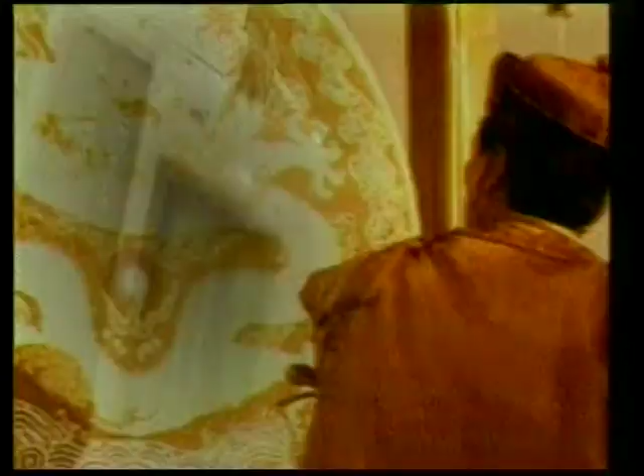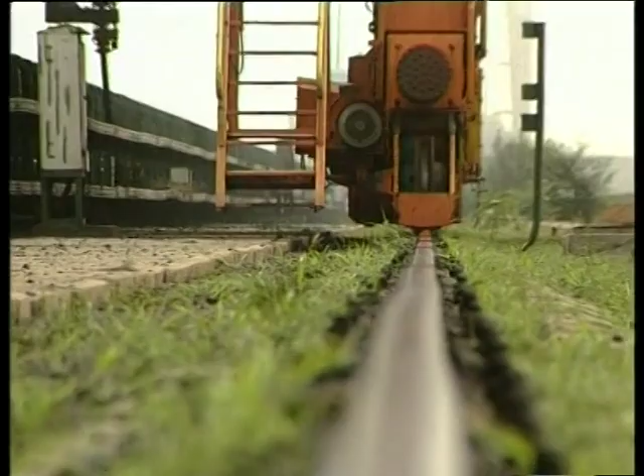The city of Shenyang has a beautiful reputation, namely, it was both the birthplace of the Qing dynasty and also the capital for two Qing emperors. However, it was the equipment manufacturing industry that widely spread the fame of Shenyang. Chinese people praise Shenyang as the first son of PR China, while friends from overseas comment Shenyang as the Oriental Ruhr.

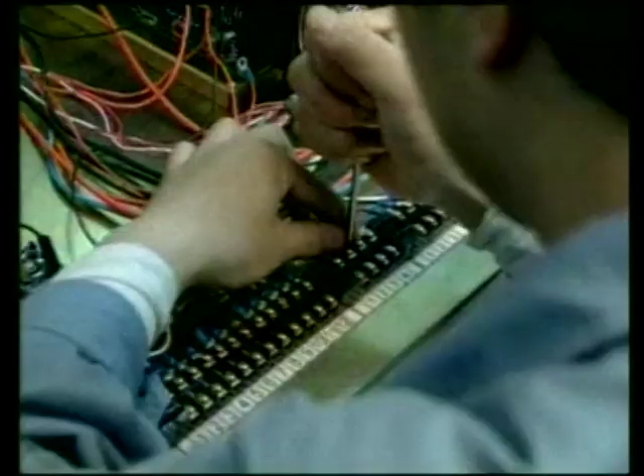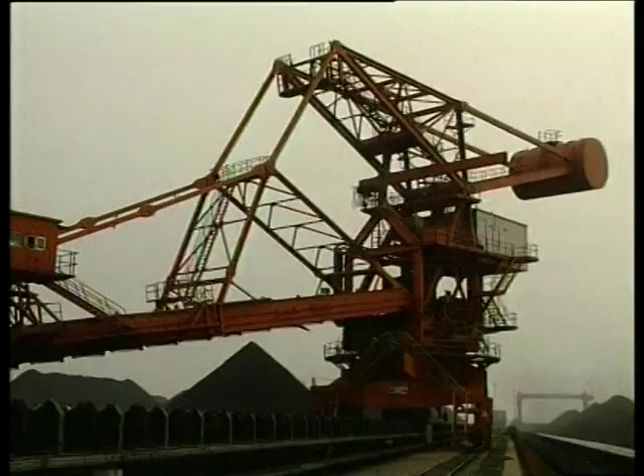Some people say Shenyang is a cradle of industrial civilization in China's recent history. It was the equipment warehouse for newly founded China. Some people even say that due to Shenyang's equipment manufacturing industry, the newly founded China could dramatically accelerate its development. People speak highly of Shenyang from the bottom of their hearts.

You may find a huge amount of famous industrial enterprises in Shenyang's equipment manufacturers list. Among them, there are many national leading enterprises. Shenyang Mining Machinery Company Limited is one of the mainstay holders of equipment manufacturers in Shenyang.

The elder people in Shenyang clearly know that there is a large and famous enterprise in Dadong District, which was called Shenyang Mining Machinery Works. She is an old enterprise with a history of more than 70 years, and changed her name into Shenyang Mining Machinery Company Limited by the time of system innovation.

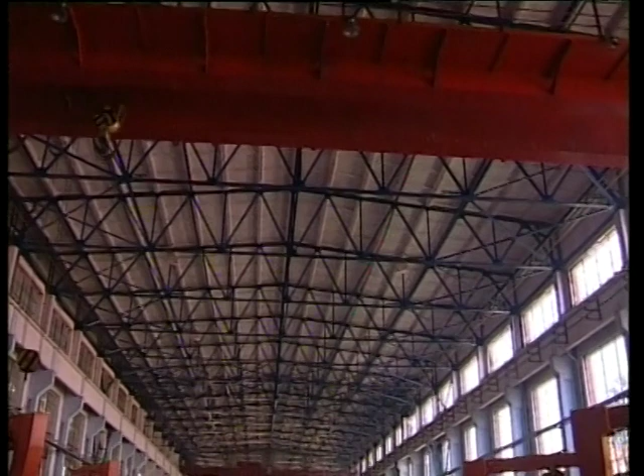In the year 2003, as requested by the State Council, she registered and founded Shenyang Mining Machinery Limited Corporation. SK is a state-owned exclusive enterprise, and also a large backbone enterprise in the heavy mining machinery industry in our country. After the reform and opening up policy, she developed into a large enterprise group combining science, industry, and trade. Through reform deepening, technology innovating, talent respecting, and management reinforcing, she is capable of serving mine, metallurgy, traffic, environmental protection, electric power, automobile, chemical industry, and building materials, etc.

In present SK, the working environment is terrific. The road is even and straight, which can broaden your mind. You will also feel relaxed and happy at the sight of the succession of green plants and bright workshops.

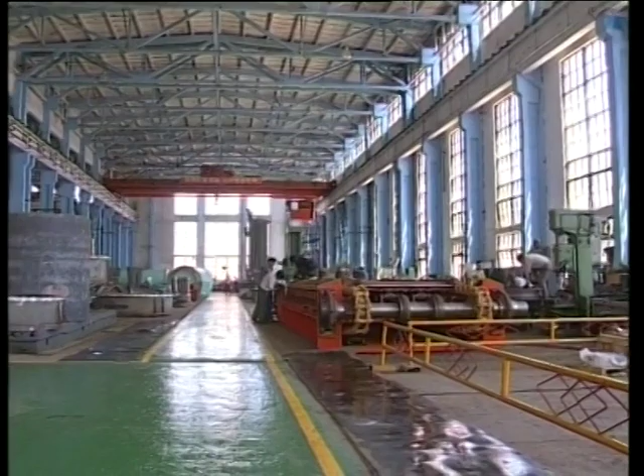In present SK, there are 12 subsidiary manufacturing and managing companies, 2 share participating companies, 3 joint ventures, and 1 rental manufacturing factory, etc. In the year 1992, SK became one of the 100 largest machinery industry enterprises in China.

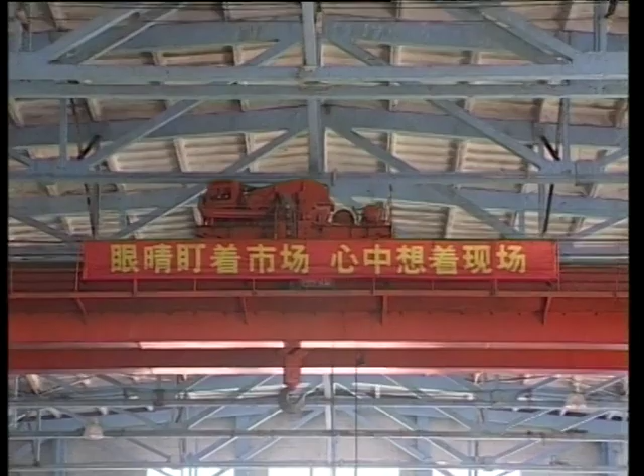In the year 1994, she was awarded as one of the largest 100 specialized equipment manufacturers in China by the Developing Researching Center of the State Council and National Statistic Bureau. In 1995, she became one of the 500 leading national enterprises. In 2001, she ranked 12th among the 100 leading national machinery industry companies. In 2003, she entered the directory of large industrial enterprises in China.

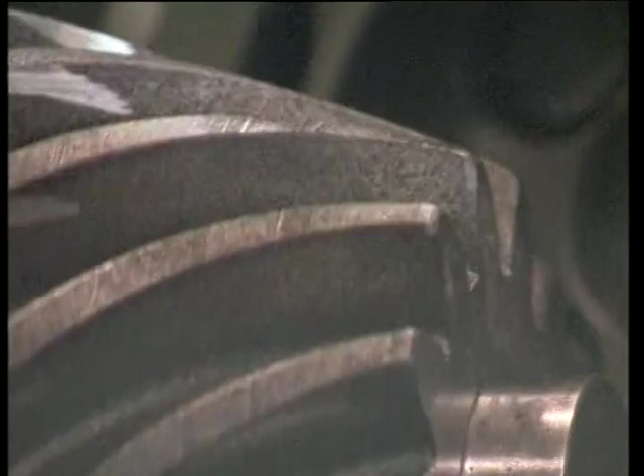SK became the cradle of China's mining machinery industry after years of development. She recorded several firsts for China's mining machinery industry. Made in SK is not only renowned nationwide, but also enjoys a good reputation in the foreign market.

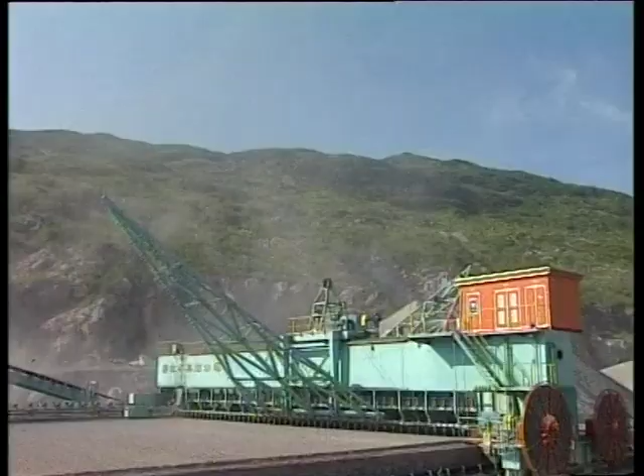When Provincial Secretary Wen Shizhen visited SK, he was amazed by the thorough transformation of SK and said the past SK could not compare with the present one.

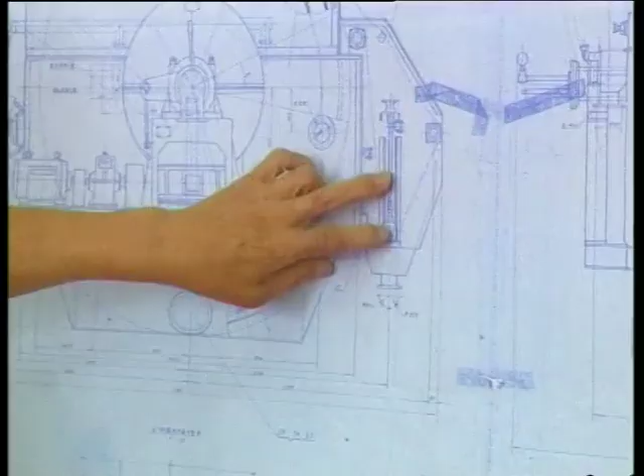Shenyang Mining Machinery Engineering Design Institute is the research and exploration section of SK, which is wholly in charge of the design of products, digestion and absorption of new technology, exploration of new products, and establishment of technology standards.

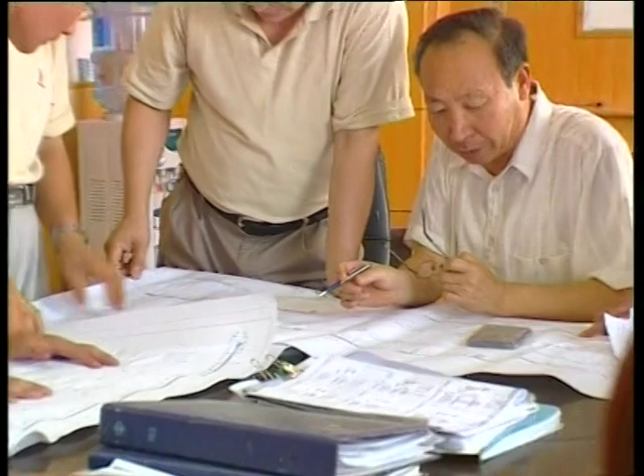After years of development, Shenyang Mining Machinery Engineering Designing Institute now possesses the Beneficiation Machinery Researching Institute, Product Exploring and Researching Institute, Manufacturing Technology Researching Institute, Conveying Machinery Researching Institute, Transmitting Machinery Researching Institute, and Magnetic Technology Researching Institute, etc. Among them, there is a National Secondary Researching Institute.

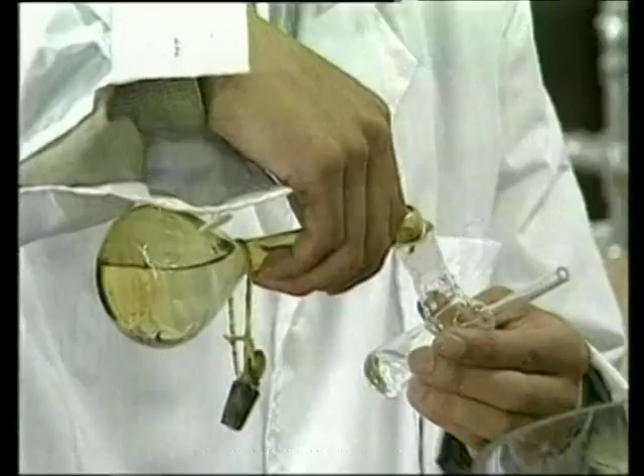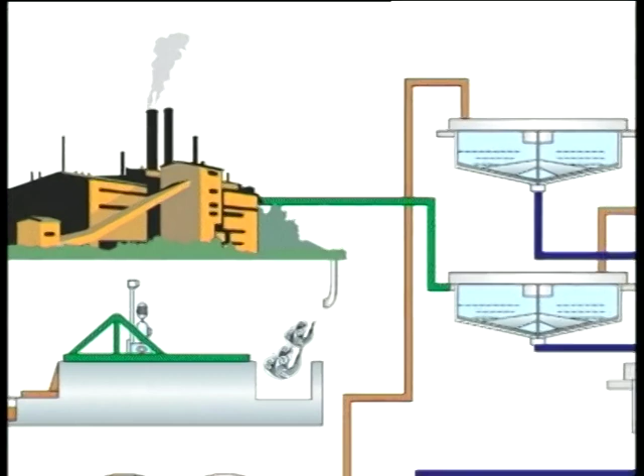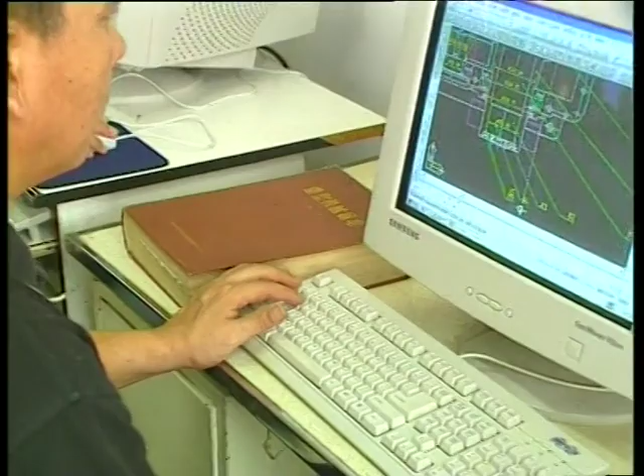There are almost 1,000 engineers working on product exploration, design, manufacturing technology, and equipment research. More than 300 senior engineers are among them. The abundant technology innovation substantially improved the manufacturing level.

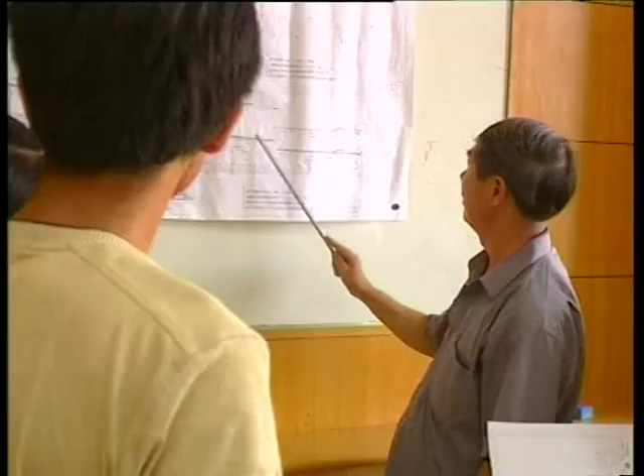During the period of the 7th Five-Year Plan, 8th Five-Year Plan, and 9th Five-Year Plan, SK has worked out more than 120 products to fill in the domestic market blank, and the current technical level is close to or reaching the international advanced level.

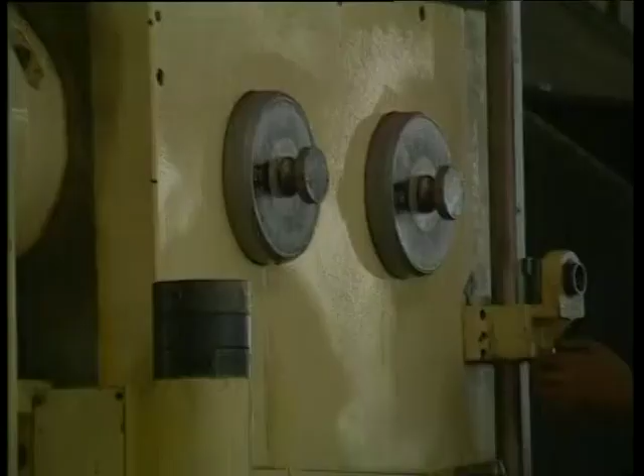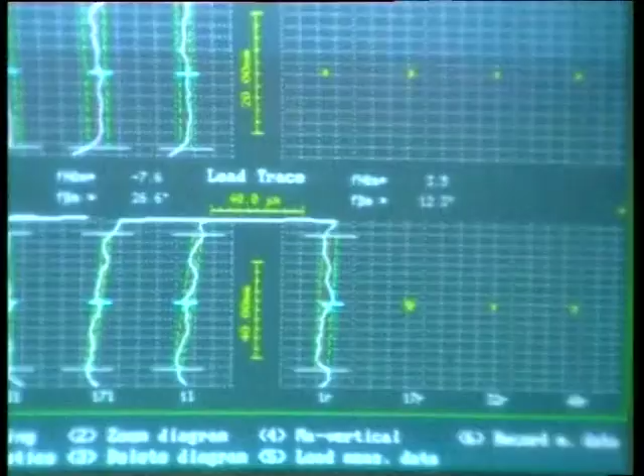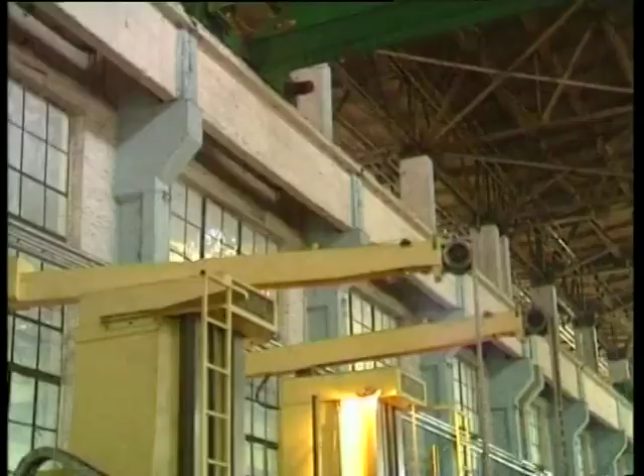As the saying goes, a subtle tool is better than skillful hands. With the continuous tracking, introducing, absorbing, and improving, SK has excellent manufacturing equipment and first-class gauging devices. The equipment for welding, casting, lathing, planing, boring, grinding, and heat treatment empower the processing capability. The large equipment such as welding equipment from Germany, milling and boring equipment from France, and gear processing center is more than 230 sets, dramatically boosted the manufacturing level and processing measure.

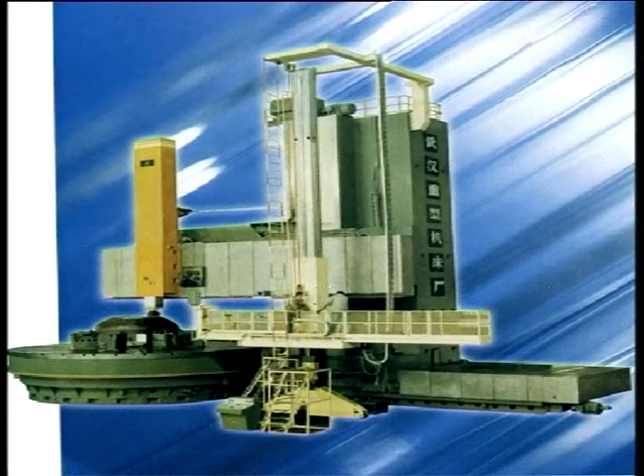Now SK starts its technology improving program, which is the largest scale, highest standard, in investment after SK was founded. The general investment is 120 million RMB, which will be spent in purchasing digital operation center that includes 55 sets of large key equipments and build a workshop for machining and installing that occupies 20,000 square meters.

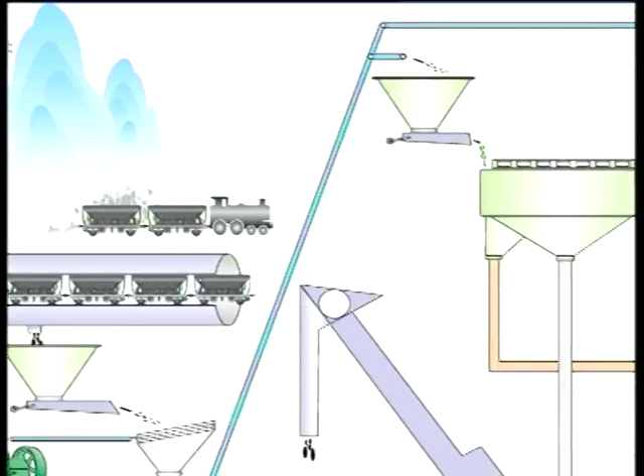By that time, SK will be able to research and manufacture set products such as mine exploring and transmitting equipment that daily production is from 5,000 to 10,000 tons, mine dressing equipment of which production is over 4 million tons, mine dressing equipment of which annual production is over 6 million tons, and water treatment equipment of which production is over 200,000 tons, hydraulic and pneumatic excavating equipment of which annual production is 40,000 tons.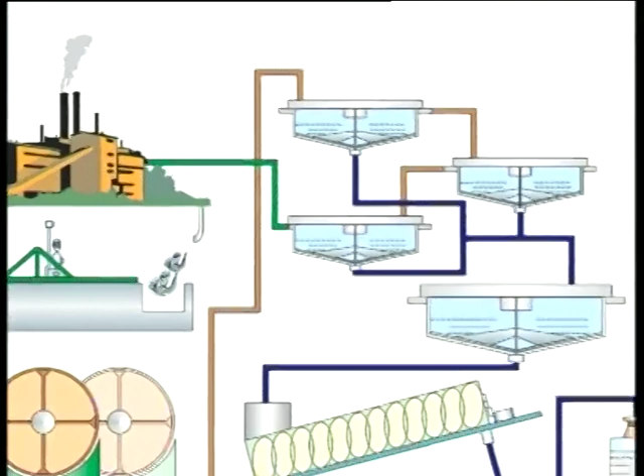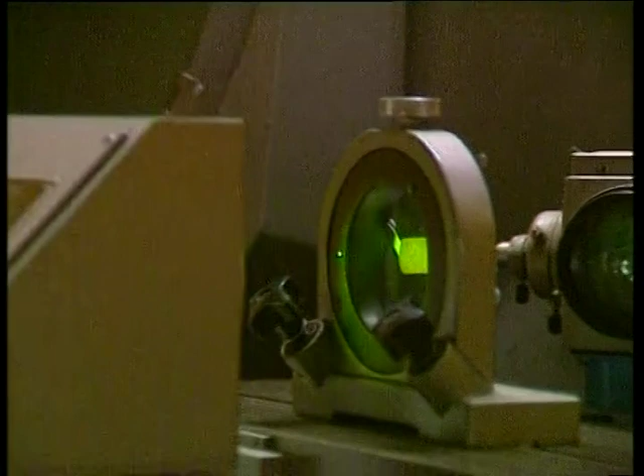There is a gauging and inspection center in SK, and there are also inspection stations in branch companies. SK can test the purchased material on physical property and chemical content, inspect the thickness of paint film and adhesive force, X-ray fault detect for weld, magnetic powder inspection, ultrasonic inspection, and gear inspecting machine which was introduced from Germany, etc.

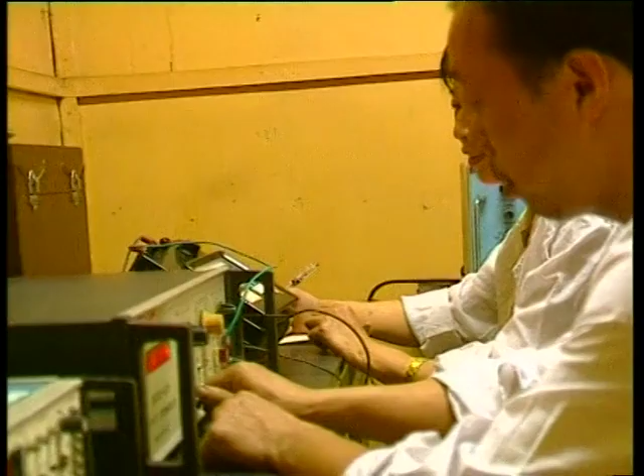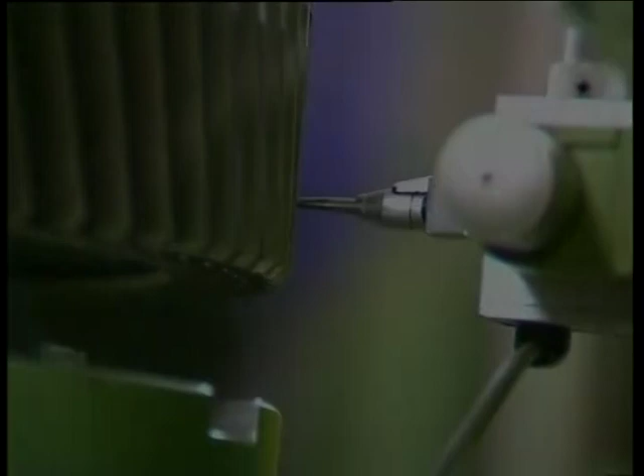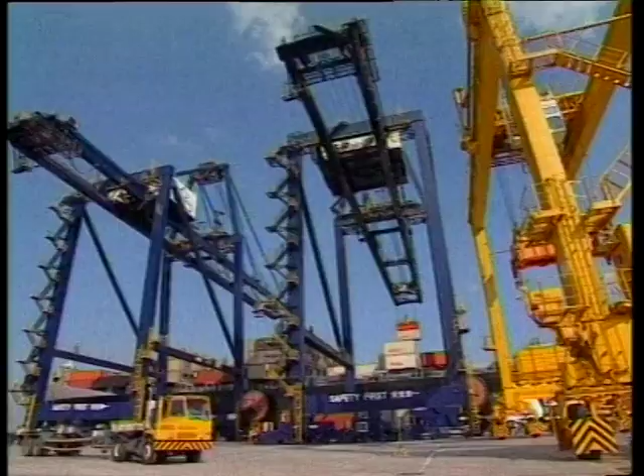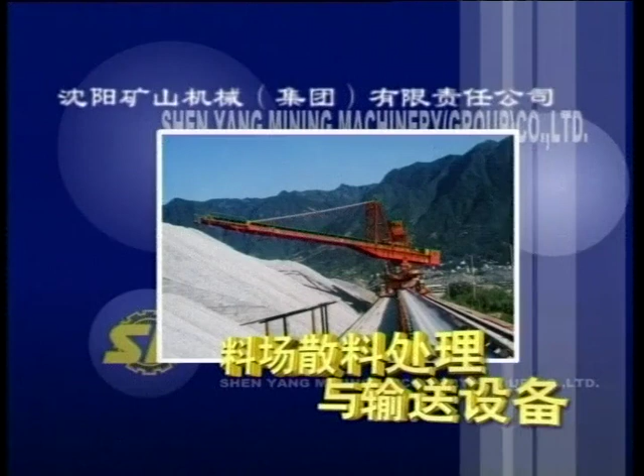In the market economy, the companies compete by capability, contest by products. SK exactly obtains the market by the innovation of products. The leading products of SK are mixed transmitting equipment for stockyard, mine dressing equipment, bulk transmitting equipment, construction machinery equipment, building decoration material, environment protection equipment, automobile switches, and magnetic material. The sort of products is more than 500. The classic products of SK are as following.

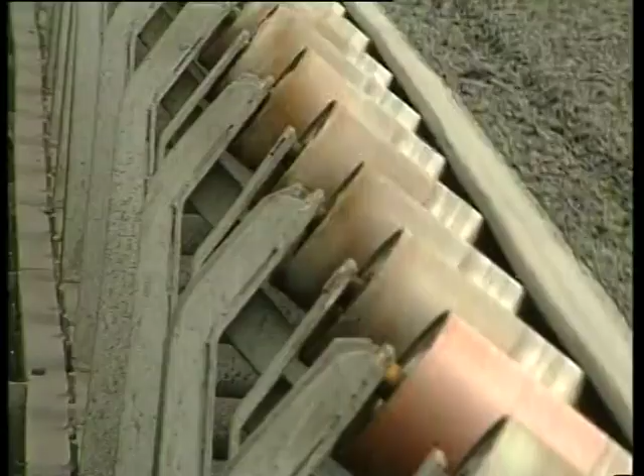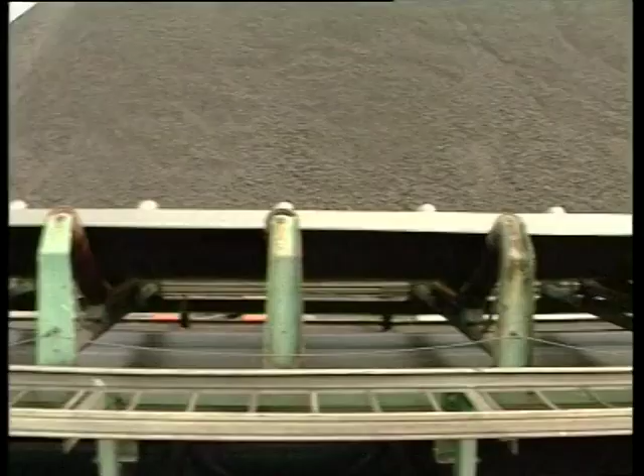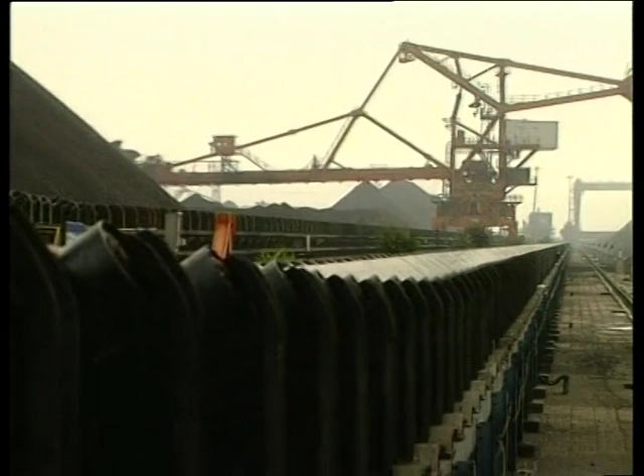From the 1980s, SK began to introduce the manufacturing equipment and exclusive technology for belt conveyor, then explore the long-distance, high-speed, and strong carrying belt conveyors, taking the place of the imported products in China. During the 1990s, SK explored the mobile belt conveyor and excavating system, telescope belt conveyor, and pipe belt conveyor, which formed the annual production of 50,000 meters conveyor. Up to now, belt conveyors made in SK take up 25% in total market shares. SK is the largest belt conveyor manufacturing base in China.

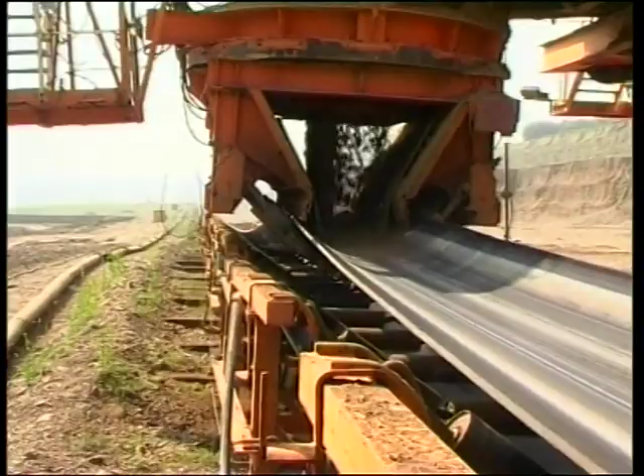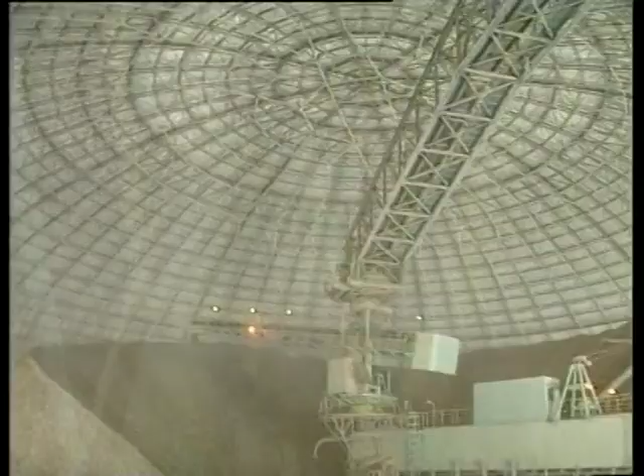It was explored during the period of the 9th five-year plan, the mixing stackers and reclaimers, bucket wheel stackers and reclaimers, and dome stackers and reclaimers for cement industry. Metallurgy industry and port are very popular in the market. Only in the year 2003, SK manufactured 96 sets, which value is 250 million yuan RMB.

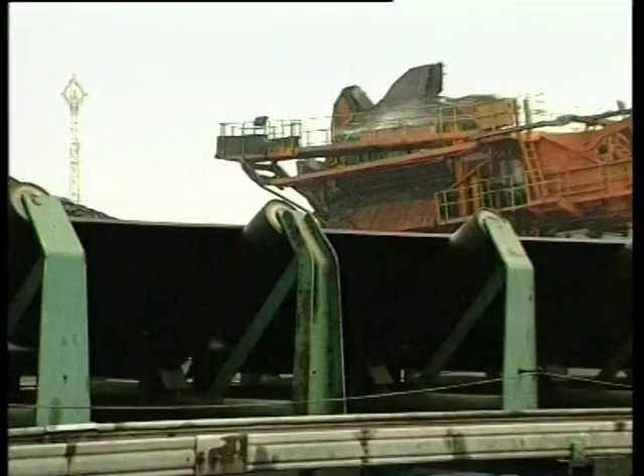The stackers and reclaimers made in SK for Shanxi Gujiao power plant is the largest in China, whose stacking capability is 2,000 ton per hour. Reclaiming capability is 1,500 ton per hour. The heroic portrait of SK stackers and reclaimers will be seen nationwide.

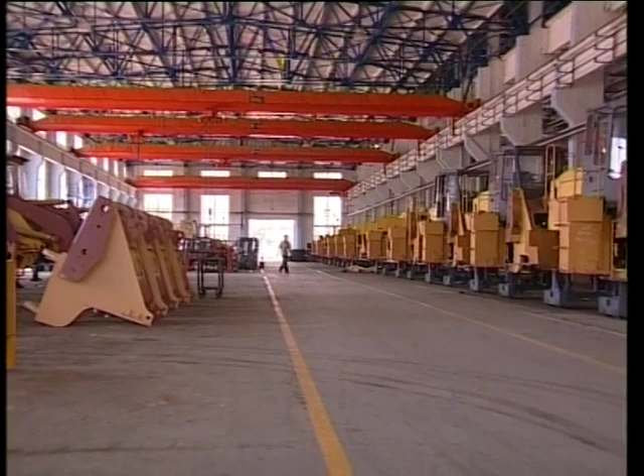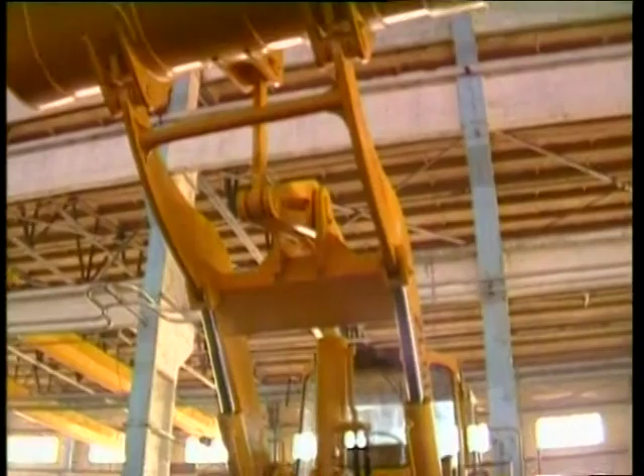The first PL70 loader was born in SK. For ages, SK has been developing and supplying plateau loader for Tibet and Qinghai province. Co-produced FL460 wheel loader and improved FL3301 loader with Japan. Manufactured the ZL50G with advanced equipment in China. The loaders made in SK have driven nationwide and are ready to reconstruct the world.

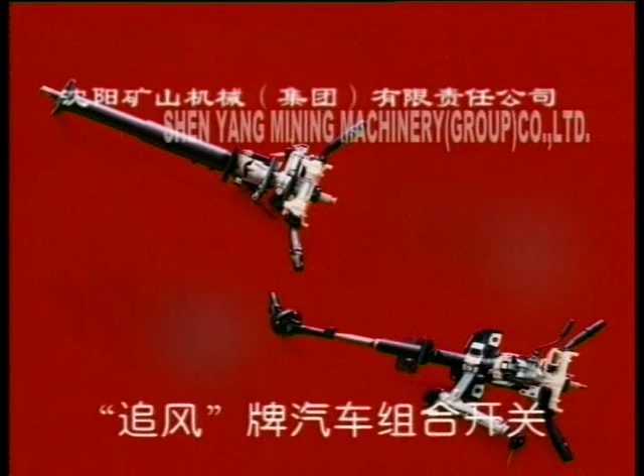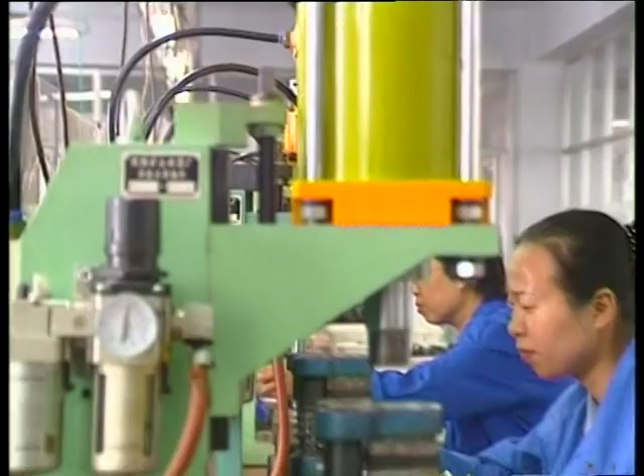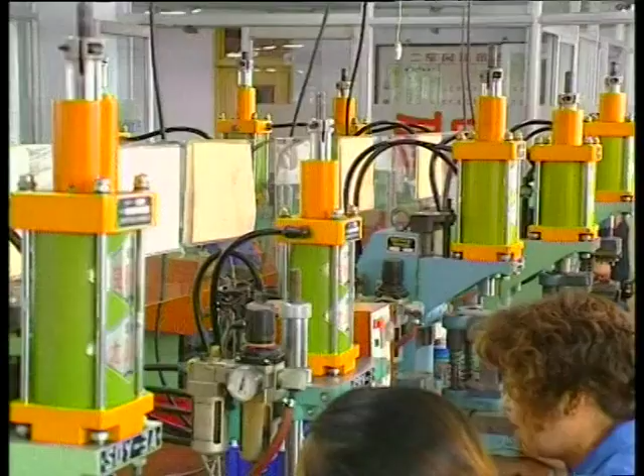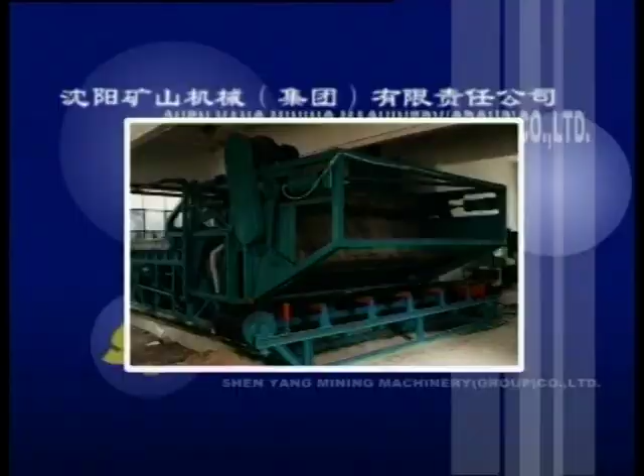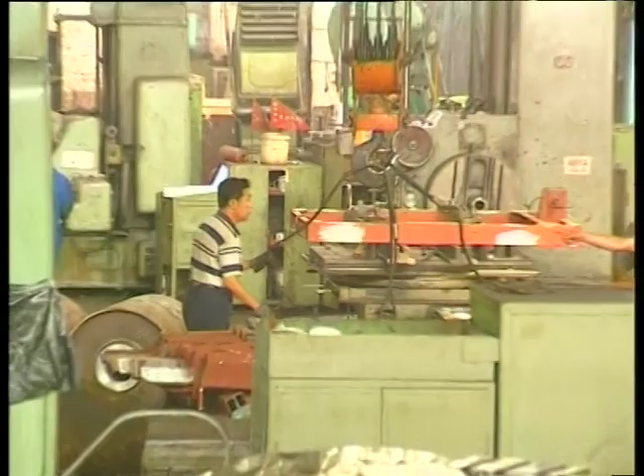Environment protection equipment is the traditional product in SK. Early in the 1960s, SK's water treatment equipment played an important role in Beijing Municipal Polluted Water Factory. In recent years, the new products developed and manufactured in SK are able to meet 90% of the requirement of the water treatment factories, and all the products reach the international advanced level.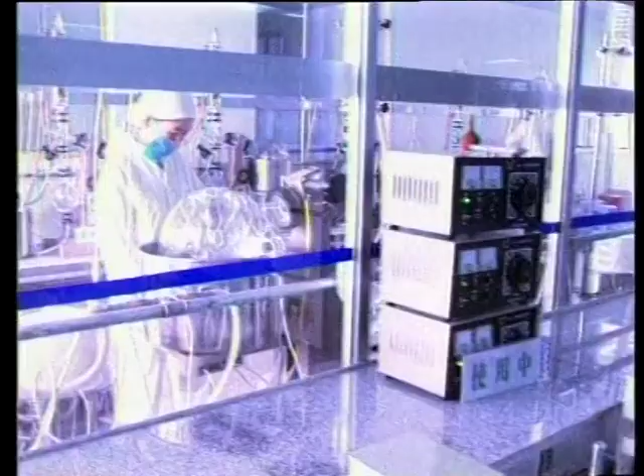With the constructing of SK's National Technology Center and Technology Improving Program, it is reasonable to believe that the environment protection industry in Shenyang is forming the largest environment protection base centering on SK.

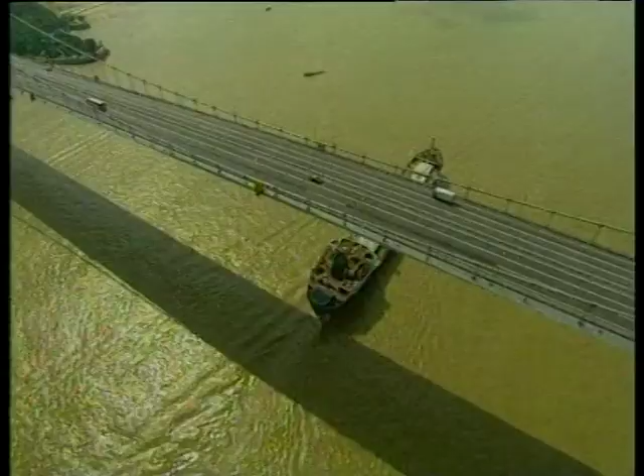WTO built a broad stage for SK to join the new turn of global industry transformation. When GM, Siemens, and other famous manufacturing giants come to China to seek new opportunities, our city also faces a golden opportunity to achieve a spanning development. Made in SK, as a famous brand, will compete and cooperate with other international equipment manufacturers and then practice itself for further development.

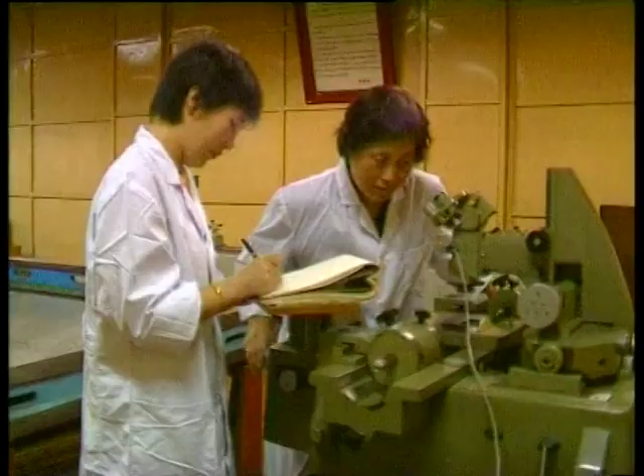SK's industrial advantages reignite SK people's hope to rebuild brilliance and rejuvenation. Made in SK solely takes the responsibility to equip China and Orient at constructing the world factory. We firmly believe that the future of SK